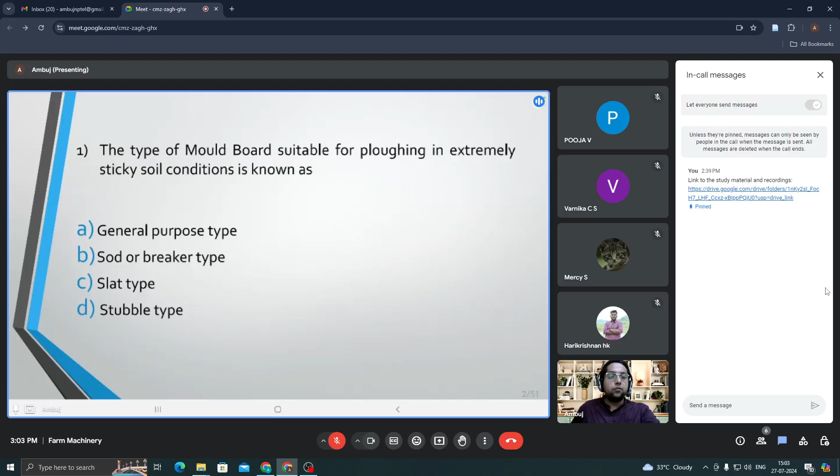So the very first question for this session is this: the type of moldboard suitable for plowing in extremely sticky soil conditions is known as general purpose type, sod or breaker type, slat type, or stubble type. Based on the previous week's content, just try to answer this question. You need not be correct in the first attempt, but just try to solve it. Give your options in the comment section or in the chat box.

Just try to give the right option. Only the option can also work, if you don't want to type the full option. Yes, Varnika has answered slat type. The type of moldboard suitable for plowing in extremely sticky soil conditions. Yes, Hari Krishnan has answered slat type. Okay, great.

Two more people are left. Please do try to answer it. There is no penalty, nobody will harm you. Whatever option comes to your mind, you can just give the option. Okay, Mercy is saying slat type. Okay, slat type. Great. Let's proceed.

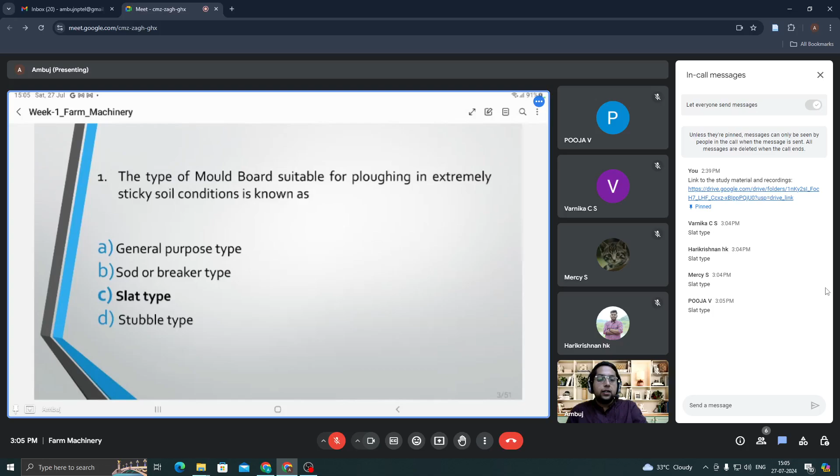Yes, the type of moldboard which is suitable for plowing in extremely sticky soil conditions is known as slat type. Let us look at the explanation in detail. These are some of the types of moldboard available in a moldboard plow. First, the general purpose bottom. It lies in between the two extremes and is suitable for a wide range of conditions, not specifically for one particular attribute, but it can be used for a lot of purposes. That is why it is named general purpose.

Second one was sod or breaker type. It has a long and low moldboard with a gradual twist, or spiral, that completely inverts the furrow slice with a minimum of breakup, thus covering the vegetative matter thoroughly. This is very useful when you have bushy conditions or some type of debris on the soil. You can invert the soil and convert the vegetative matter into manure. For that purpose your sod or breaker type bottom is useful.

Third option was slat bottom. It has portions of the moldboard cut out and is extremely useful in extremely sticky soil conditions. And the last option was stubble bottom. It has a relatively short and broad moldboard that is curved rather abruptly near the top, resulting in a greater degree of pulverization than with the other types. These are four different types of moldboards and their uses.

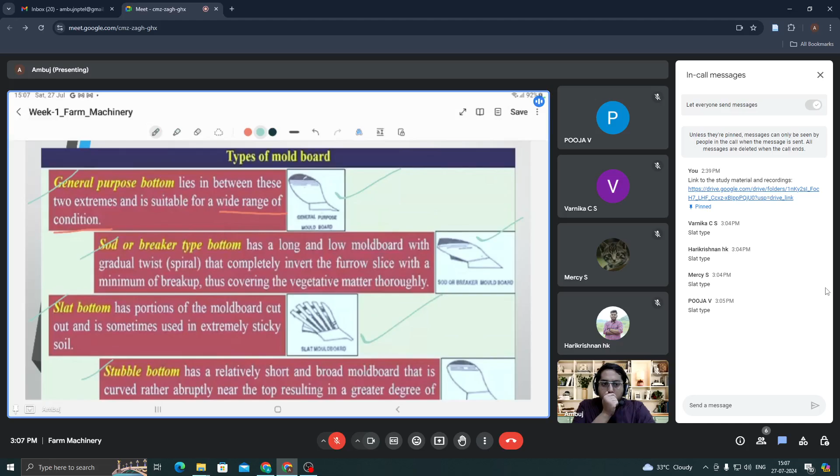Now I'm trying to be a little bit interactive with you people. If you have gone through the lectures, just answer how we model the surface of a moldboard. My question is very simple. These are the types of moldboards. Now I have seen a moldboard and I want to model it. For your understanding only, just try to give the answer: how can I truly design or create the surface of a moldboard? Any idea? Anyone?

You can type also, or if you want you can unmute and just tell me. Based on the soil surface. Very good. Hari Krishnan is saying that based on the soil surface. I think you didn't understand the question.

I just wanted to ask you how you will model the surface of a mold board. Modeling means I want to create a design of that particular mold board. So I'll try to create some surface, then I'll try to model it, and then I'll try to do some analysis so that we know which type of mold board is suitable for which type of soil condition. So how to model that surface? Yes, you want to answer? Then you can please answer.

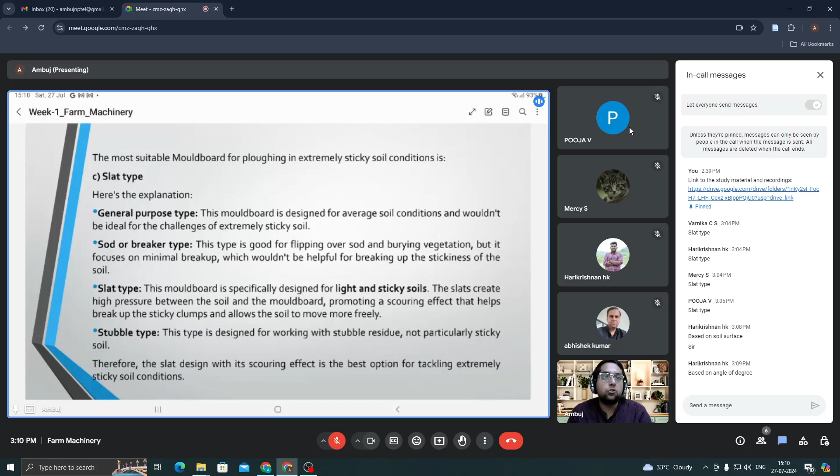The most suitable mold board for plowing in extremely sticky soil conditions, as I already told you, is the slat type. General purpose type is for average soil conditions. This one is important, please do remember. It wouldn't be ideal for extremely sticky soil conditions. Sod or breaker type is good for flipping over sod or burying vegetation. If you have some debris on your soil and you want to bury it to improve soil fertility, you can use the sod or breaker type.

Slat type is extremely useful for light and sticky soils. The slats create high pressure between the soil and the mold board, promoting a scouring effect. What do you mean by scouring? Scouring is the process of destruction of the outer layer of the soil. The scouring effect helps break up sticky clumps and allows the soil to move more freely. So free movement of soil is there because of this scouring effect. Slat type, good.

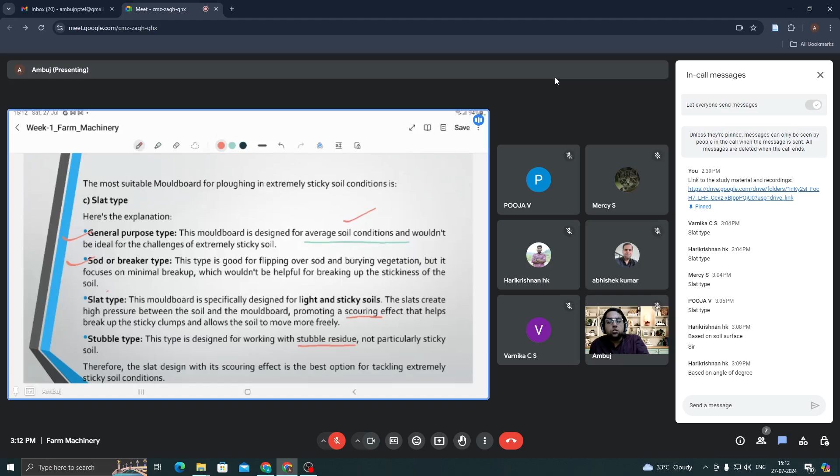The stubble type is designed for working with stubble residue, not particularly sticky conditions. So each type of mold board has a particular use. We have modeled it, and how the modeling is done I have also told you, just for your curiosity. In the design process we know which type of implement or cutting tool we have to use for which type of soil conditions, and that is done by finite element modeling. That was just for your information and understanding.

Clear? If anyone has any doubt, then please do ask me. Otherwise we'll move forward. If you are clear, then please type clear. Meanwhile, be as responsive as possible in this session. Clear, great. I'm assuming that everyone is clear.

We'll move forward. A very simple, very easy question, please do try to answer it. The disk angle in a standard disk plow varies in the range of: 40 to 50 degree, 42 to 45 degree, 15 to 25 degree, or 25 to 30 degree. Please try to answer this question. I am talking about the disk plow, and I want to know what the disk angle is.

42 to 45, okay, great. Two people have answered B. Try to be as responsive as possible; this is a live interactive session for you. Do try to clarify all your doubts. You need not be correct in the first attempt, just try to answer. Two people have said B, one has said C, and another one has said A. Great, a variety of options. Yes, Abhishek Kumar, if you have any doubt, please ask me. No, sir, no doubt.

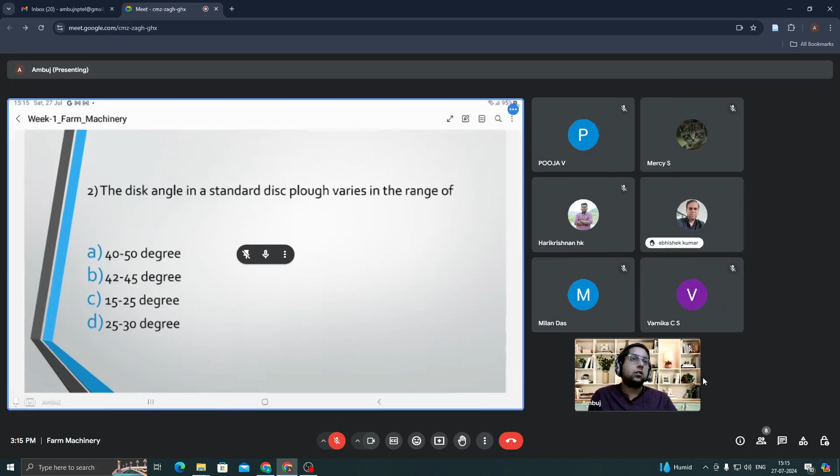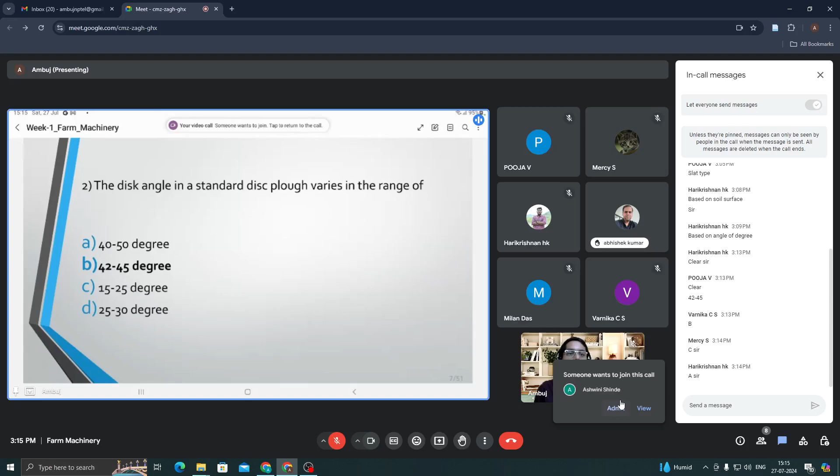Let us understand what these angles are. Here you can see a disk. If you draw a vertical plane which passes through the center of the disk, the angle the plane of the disk makes with the vertical is known as tilt angle. With the direction of traversal, the angle the disk makes with the horizontal axis is known as disk angle. These are two particular angles.

So the correct option for disk angle would be 42 to 45 degrees. It is a very narrow range. How we came to that, I'll tell you. Just in a few minutes I'll explain how we arrived at that particular range. Just bear with me.

15 to 25 degrees, this is a range for tilt angle of the disk, as I already told you, not the disk angle. Tilt angle refers to the angle between the disk and the vertical plane, whereas disk angle is the angle between the disk and the direction of travel.

Very simply I have explained here what is tilt angle and what is disk angle. Sir has already explained these terms in the lecture, but I am explaining once again in very simple terms. Then the other option was 25 to 30. It's very low. As compared to standard disk plows, we don't generally prefer this much lower disk angle, because it can reduce the penetration but at the same time it will also increase disk rotation.

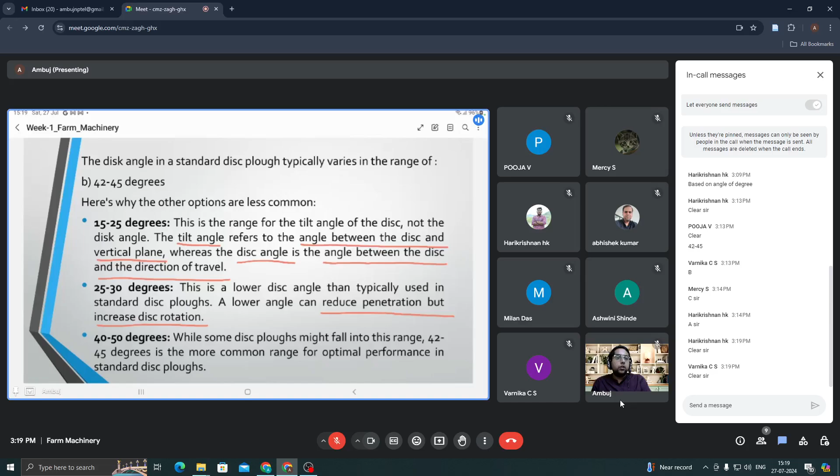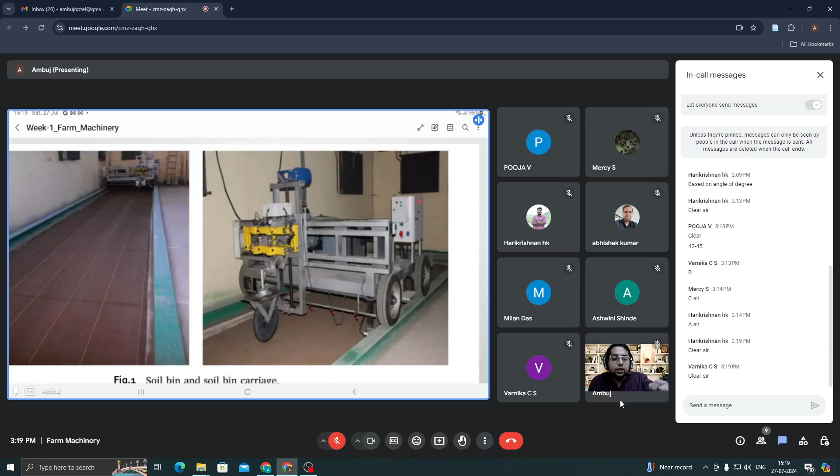Now just see this particular figure. Here I'll zoom in for you. This is soil bin. This is soil bin, left figure. This is soil bin. Here what is happening? This particular thing is known as soil bin carriage. This particular machine is there and it is run in this particular soil bin.

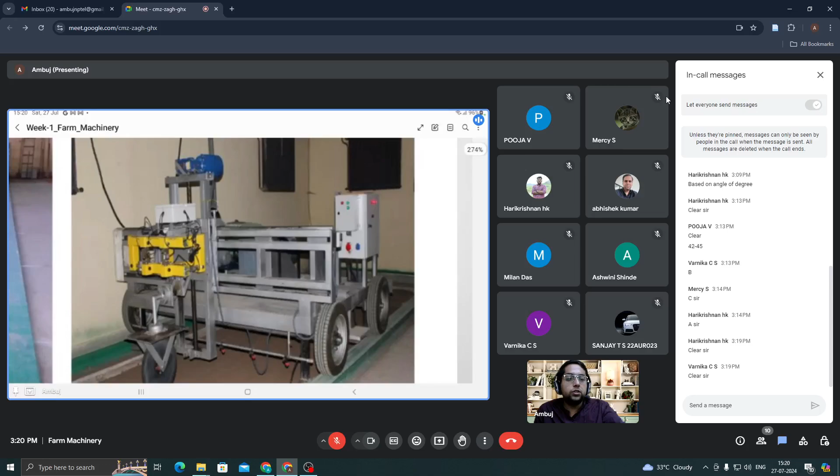So in the soil bin, different types of soil conditions are maintained. Heavy soil, medium soil, clay soil, any type of soil we can input. Here at IIT Kharagpur we have two particular soil bins, so similar to that I am showing you this picture. This particular thing is known as soil bin. Inside this, this particular setup is there which is known as soil bin carriage. Here I want you to just see these particular wheels, four wheels are there.

Four wheels are there, which will guide through this particular setup. And this particular is power unit.

And here, this particular screw, which I'm just putting an arrow to, is the lead screw. It is used to lower down or increase the height of this particular carriage. This is the lead screw, the black one.

This one is your motor. Just try to visualize this. This is another control box.

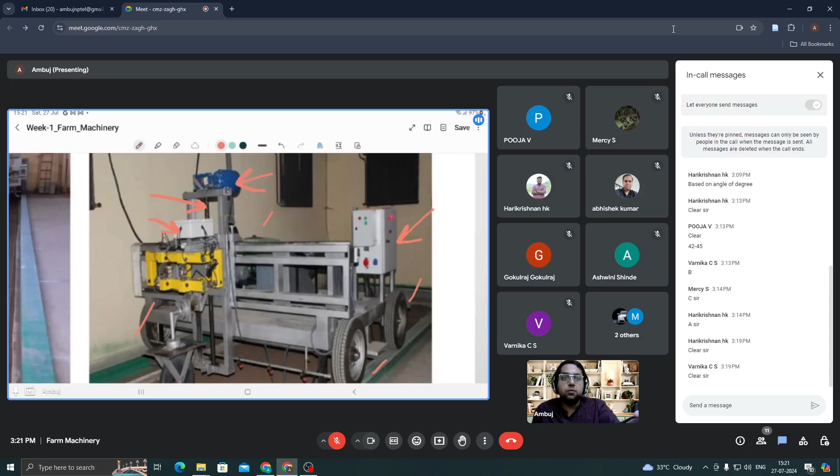And the most important thing which I want to show you is this particular thing here. I'm just creating a box around it. Here I have placed one disk, and the disk is supported by this platform. This particular platform is just connected to this rod.

What is this setup? This setup is provided so that you can change the disk angle, and the tilt angle of the disk, and mechanically actuate the disk in the soil bin so that you can calculate the forces. For force calculation, force transducers are fitted.

Force transducers - what are those? Those are strain gauges put in a Wheatstone bridge. Simply, you can understand the Wheatstone bridge - it's a concept you must have read in class 12th. Four resistors when connected in this form. I'm just giving you the concept in short.

In this particular manner, like this: R1, R2, R3, and R4. They have to be connected in this particular diamond shape, and the ratio has to be maintained such that R1 by R4 is equal to R2 by R3.

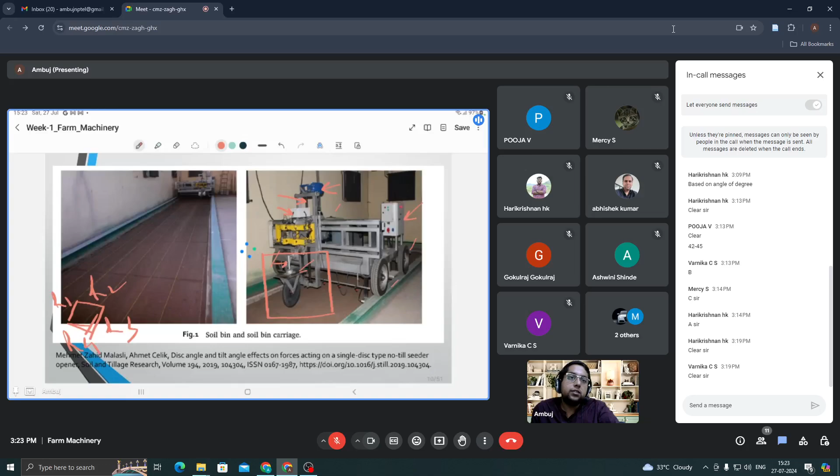So in this particular configuration, known as the Wheatstone bridge, when any amount of force is induced, as you know R is rho L by A, then the resistance of the Wheatstone bridge changes.

So when resistance changes, then what happens? The current changes, and we can calibrate this change of current with load. So this is the basic principle of the working of a force transducer - it is nothing but four strain gauges put in a Wheatstone bridge.

So these force transducers are used to measure the force - whatever is the amount of draft force, vertical force, side force, each and every force we can calculate using the force transducer, fitted on this particular setup.

Lowering or increasing the height, depth of penetration, that is also available. Changing the angle is also available - the disc is joint here only rigidly, but the rest of the angles we can very easily change by just loosening the nuts and bolts and tightening them to the correct amount of angle.

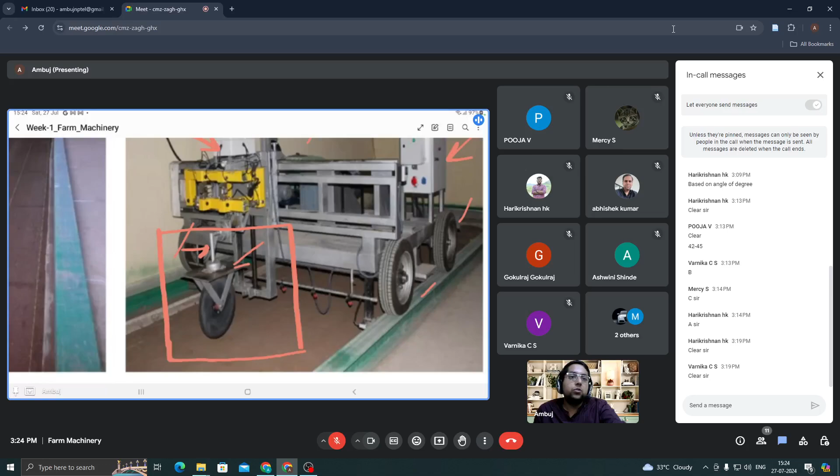So here in this particular setup we just perform the test. Now here's another figure - here we have done it for a single-disc type furrow opener, and loading also you can see here. Very nicely they have depicted how disc angle and tilt angle we can change, and we can measure the amount of forces.

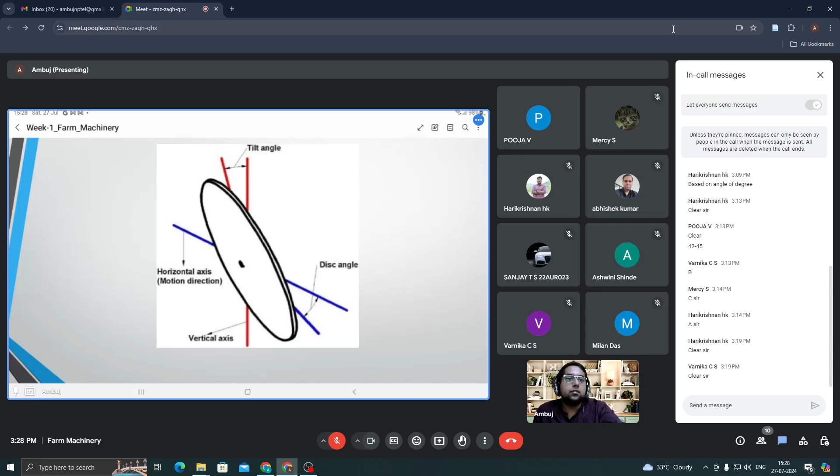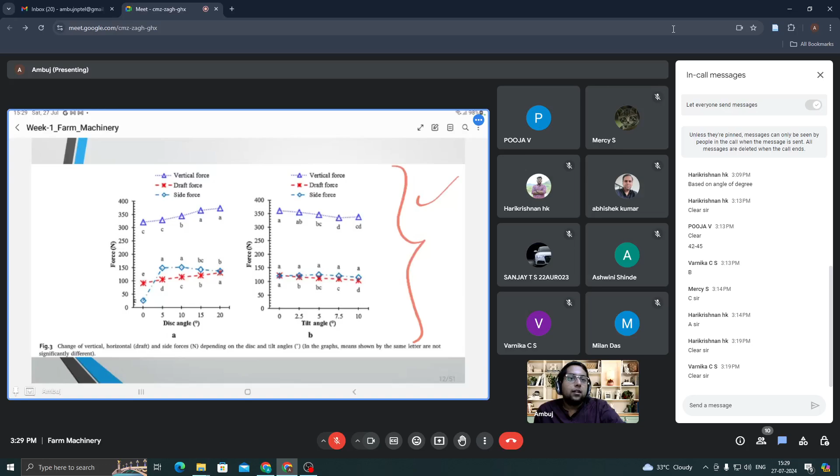Okay, sir. Yes, sir. Okay, clear? Any doubts, anybody? Clear, not clear? Everything clear? Feeling boring? Want to speed up? Anything? Clear? No response. What happened? Clear. Great. Okay, let's move forward.

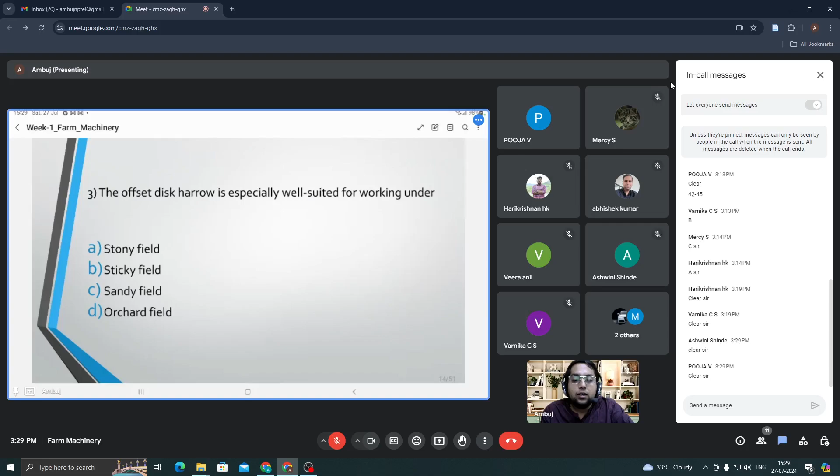The offset disk harrow is especially well suited for working under stony field, sticky field, sandy field, or orchard field. Four options are there. Just try to answer it based on your knowledge.

A lot of people have joined. Oh yes, yes, please, Abhishek Kumar, please do try to answer this question. If D, yes, option is D. You can just type it. A lot of people have joined, so I'll not be able to note, you please just type it. A lot of new people have joined. I'll be posting questions based on the previous week's content. Please do try to answer it using the comment box, chat box. Yes, Pooja wants to say something.

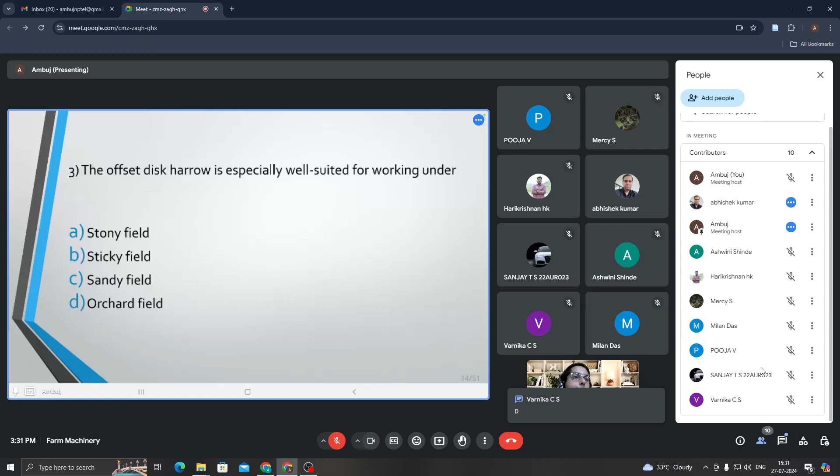Okay, two people are saying D. I'll write here D option from Abhishek. A lot of people are saying D. Great. Nice, this time we are seeing a clear majority up till yet. Anyone wants to differ from option D? Okay, D, offset disk harrow.

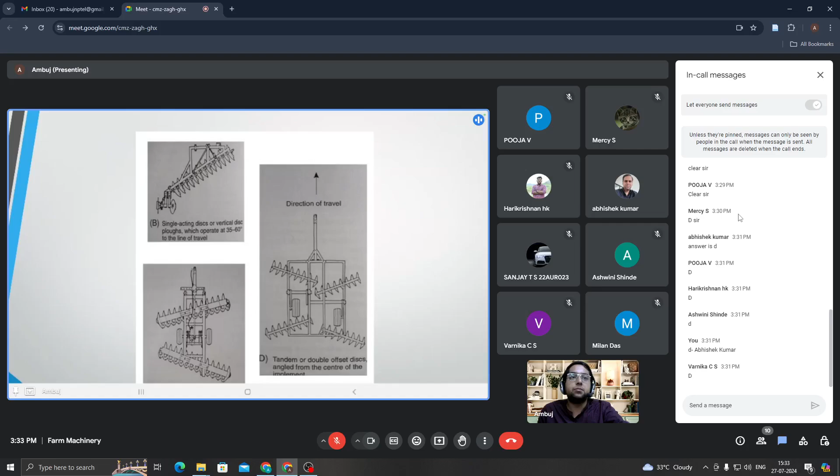Yeah, the correct option would be D. The offset disk harrow is especially well suited for working under orchard field. See here, three types of disk harrow I have shown here. First option is single acting disk harrow. Don't go for the numbering, it should have been A, here I have written B by mistake. The other one is offset disk harrow, and this one is tandem or double offset disk harrow.

Try to visualize. Single acting disk harrow will be moving. How it will be moving? It will be attached to the tractor, then it will be moving in a particular direction. This particular offset disk harrow, why it is extremely useful for orchard condition? The reason is that the line of pull would not be in a straight line, so it has a high maneuverability, so it can just move around the trees. This is the reason we consider offset disk harrow for orchards.

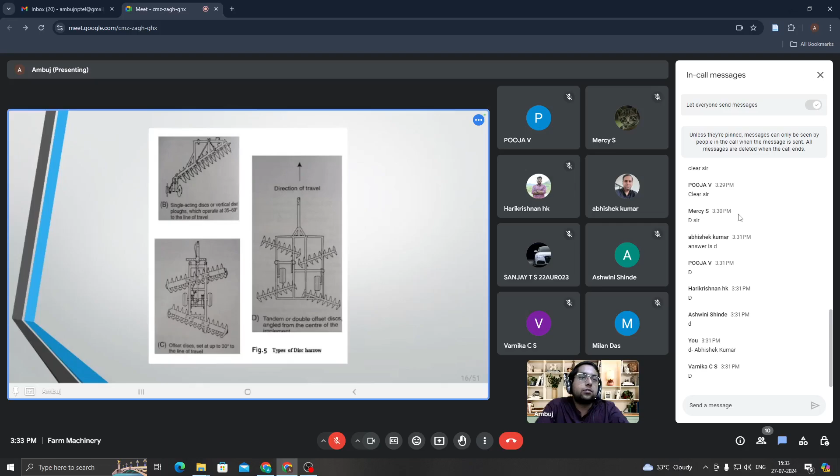Offset disk harrow, just we can see here, offset disk harrow is an agricultural implement that is used to till the soil where crops are planted. Obviously all the harrows are for this particular purpose only. Consists of series of concave metal discs arranged in two or more rows. I already showed you.

These discs cut into the soil, breaking it up and turning it over. Okay, offset disc harrow. Suitability for different field conditions. Stony field. I have analyzed all the options for you. Just after this class or during this class also, just try to go through how you can analyze. The first condition was stony field.

What is the challenge? A stony field can damage the disc of the harrow and reduce its effectiveness. That is why disc harrow is not a particular option. Stones can cause wear and tear. It's harrow, not plow. You might ask me that a disc plow is generally suited for stony conditions. Both the implements have different designs.

The harrow has a lesser diameter disc as compared to the disc plow. The diameter of the disc plow is large, as well as the strength of the material is also large. Stones can cause wear and tear. That is why we are not going for stony field conditions.

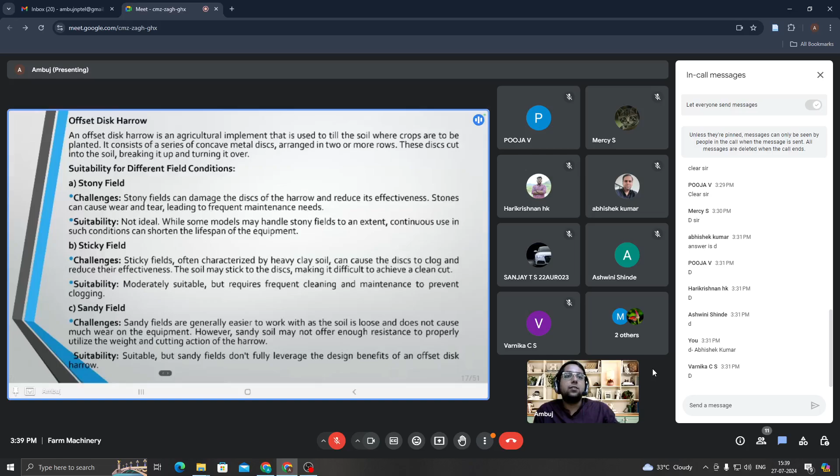This is the explanation from my side. Any doubts, anybody? Please do ask me. I have analyzed each of the options, not just the correct option: A, B, C, and D, and I have told you why the offset disc harrow is best suited for orchards. Any doubts? Anybody? Clear? Not clear?

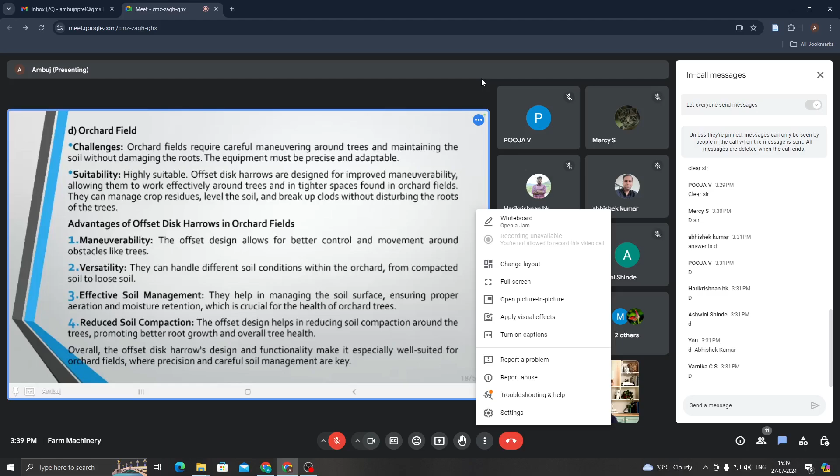No response. Clear? Not clear? Any doubt? Anything? Clear. Okay. Clear. Good. Clear. Great. I think in the afternoon, most of the people have had a great lunch. That is why people are feeling sleepy. If it is the case, then you can tell me. I'll adjust my pace accordingly. I'll try to explain it once again if you are feeling sleepy. Okay. Good.

Now moving towards our next question. Which type of blade is most preferable for operating the rotavator in trashy conditions? This question is again related to design. So think accordingly and then try to answer. Options are twisted blade, straight blade, curved blade, and L-type blade. Do try to think first, then try to answer. Take your time, but try to answer it correctly. Yes, Varnika has answered. I think D. Yes, great. D. Okay.

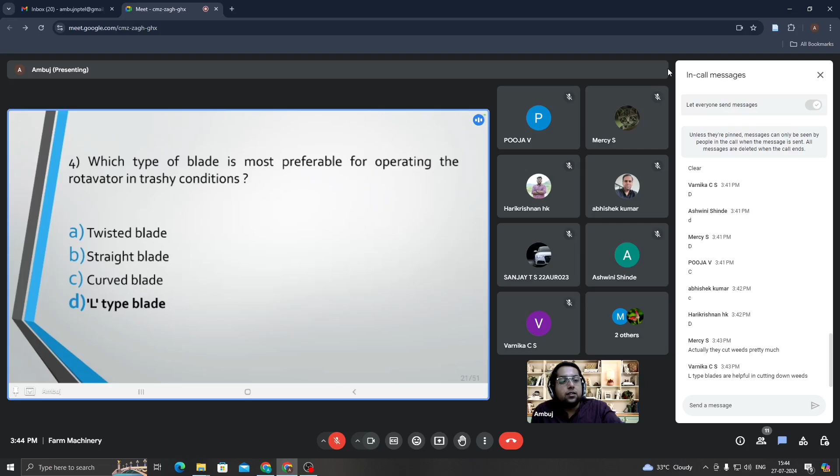I think we should move forward. Whomsoever answered D, they are absolutely correct. Indeed, the explanation is also correct. L-type blades are helpful in cutting down the weeds. That is why we will go for option D. Why not for option C? This is a particular question which you can ask me as well as you can ask yourself. I'll answer it. Make a C here. This is a blade. I'll make a C and I'll make a L.

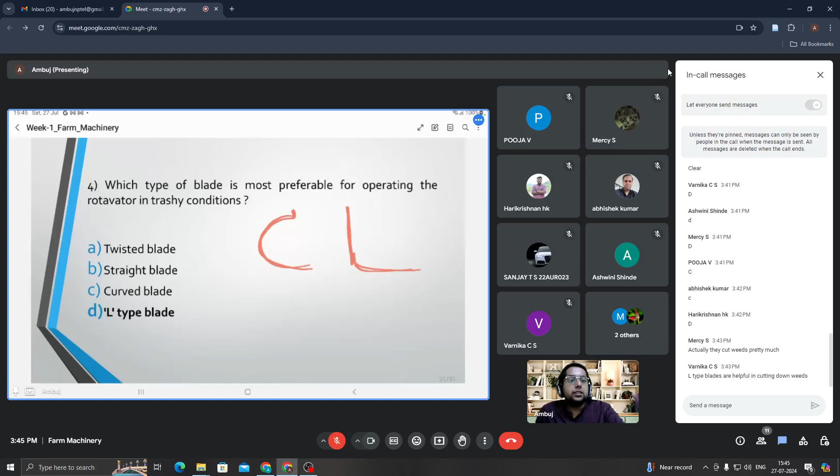This will be the profile for the blade. C will be somewhat like this. I made the curvature somewhat more, but it will be somewhat like that only. No problem. C type blade as well as L type blade. The center of stress in C type blade would be at this place. Center of stress, or the point where the force distribution would be highest. That would be this place. And in case of L type blade, it would be at this place. Do you agree?

The force concentration in the entire profile will be highest at the joint in case of C type, and at the L type it would be at the junction. I think you can very easily visualize it. If you'll go for modeling, then same result you will see. I'm telling you in advance. So in case of C type blade, the failure chances are slightly higher. In case of L type blade, the thickness of the blade is the maximum at this particular place which I have highlighted. I made a circle in both the blades. That thickness would be highest where I have circled.

Why is it so? Sometimes material is also changed because the force acting would be highest when the cutting tool will interact with the soil. The force would be highest at these particular highlighted points. So when the soil condition is trashy or somewhat rough, chances of failure would be slightly higher in case of C type blade. Otherwise, we can go for C type blade, or curved blade. But if you are going for twisted blade, the draft would be somewhat higher.

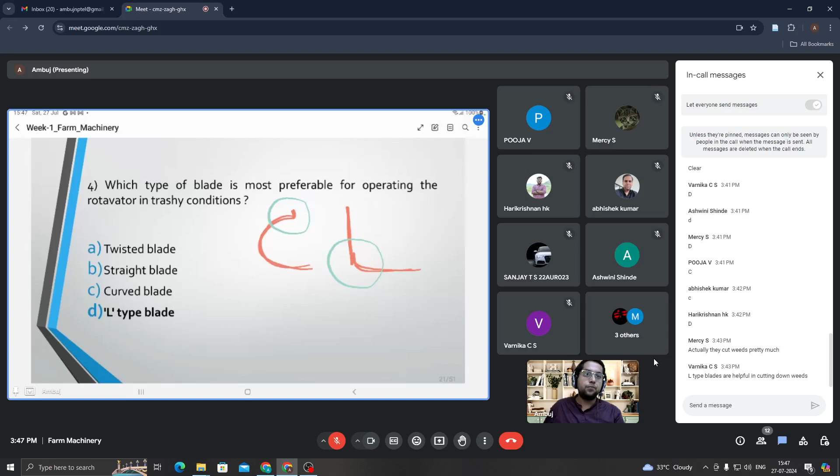Okay, twisted blade can also work. Straight blade, it is having the highest possibility of failing in case of trashy soils. Okay. Let's move forward. Look at the explanation. Twisted blade: while twisted blades can offer good mixing and good penetration, they are not ideal for trashy condition.

The twist can catch the debris. Potentially, they can cause blockages. Sometimes you must have seen also while the rotavator is operating. Straight blade: straight blades are good for general purpose tilling. Yeah, they are good. As far as the cost is concerned, they are slightly on the lower side also, but lack the aggressiveness that is needed to cut through heavy trash.

Okay, then you go for curved blade. Curved blades offer some improvement over straight blades in terms of penetration, but they might still struggle with significant amount of trash. Okay, the section is mainly concerned for it. There I have drawn C type section. Curved blades come in different types of sections. So based on the section only, I can say whether the trash or the soil mass will get stuck or not. Okay. Then your fourth option was L type blade.

Yes, L types are specifically designed for handling trashy conditions. Okay. See there the profile. If you see, the trash cannot get accumulated while the rotavator is operating. The L shape provides a good chopping action that helps break down debris while also offering good soil penetration. That makes them ideal for tilling land with significant amounts of crop residue, weeds, or other organic matter. That is why my option would be option D.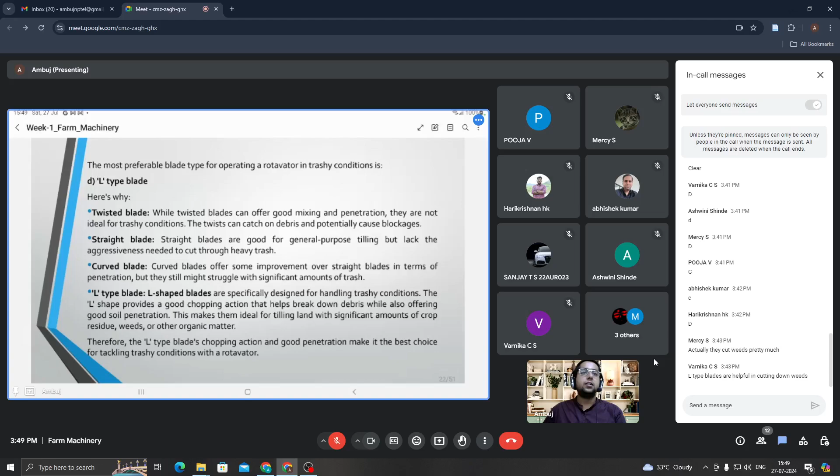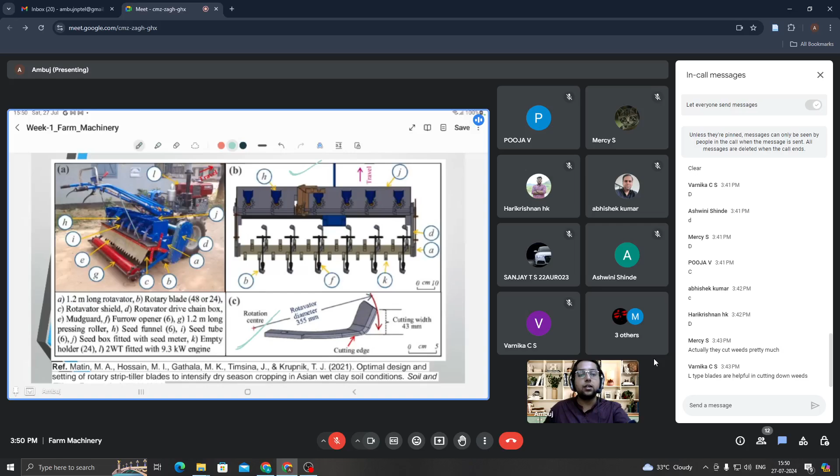Okay. See, here I have given you the detailed explanation. This is a rotary tiller. It is a self-propelled tiller which is fitted with rotavator. It's a hybrid machine. It's from a research paper. Just try to see it. So here in the C figure, this type of blade is known as L-type blade. And this particular thing in B figure is the diagram of the machine. Here the blades are fitted. So different types of blades we can always change using the nuts and bolts. They are only tightened.

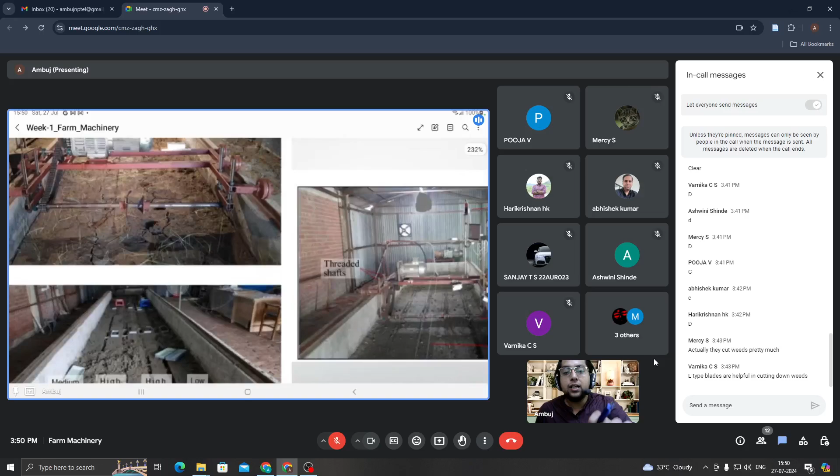Yes. So here for different types of soil conditions, medium, high, low. In the B figure, try to see it. Same setup is there. A soil bin is there. And this type of rolling structure they have made. This particular motor is AC motor. It's a high torque motor. Based on this configuration, I cannot tell whether it is AC or DC, but it would be high torque motor. Generally, we go for high torque motor because it won't be getting struck in between. The draft will change quickly. So that is why we are going for high torque motor.

We have provided in this particular figure, try to visualize, high speed camera, we have provided computer, then thread shaft is there, tool carriage is there. This particular angle iron frame is known as tool carriage. Lighting is there, rotor flange is there, winch cable is there. Why I have made this particular setup? Because I want to change the type of the blade and I want to visualize which type of blade is throwing the soil in which direction, as well as I want to measure parameters.

I just try to show you so that you can visualize how things are happening in real. It's not just for passing the course or just understanding. I want that you should understand the things in little detail, in depth, so that when you become researchers or you go in higher studies or even you go for any engineering job, you can always think how real application problems can be dealt. That is why with each and every question I try to make you visualize things.

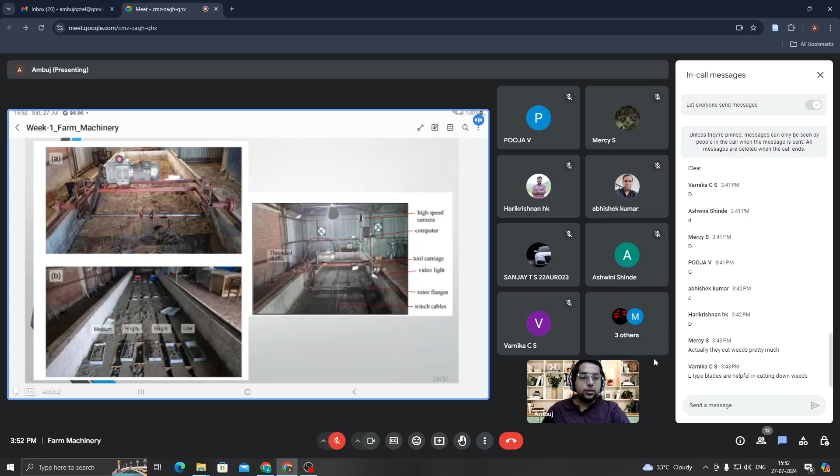It must have come to your mind that A, B, C, and D, these four are the options. But at the back, you should always think why A, B, and C cannot be the correct option, why D is the option. That is why after each and every question, I am trying to make you visualize. So this particular setup I have made. Now we'll move forward. Just a second.

So in this particular research, they have dealt with three blades: conventional, medium, straight. Four conventional blades they have tested, then four medium blades they have tested, then four straight blades they have tested, and they are up to the visualization of how the soil is getting cut. Okay, this is the main idea.

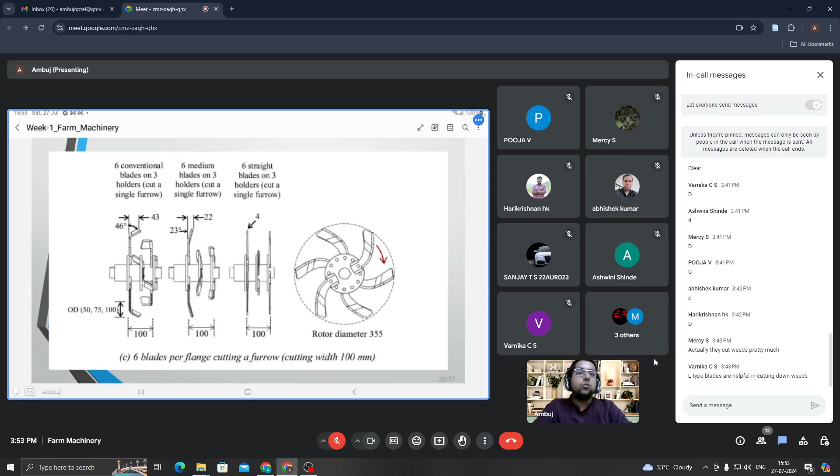Similarly, this type of combination they have also used, that if you go for straight, then straight-to-straight combination. Okay. Similarly, you can also think about what will happen if I mix the L type with the straight type. Okay. So that is from a research point of view.

Okay. See, here with the high speed camera we are able to visualize. We are able to see, when a rotavator is rotated or when it cuts the soil, in which direction I am getting the soil movement. Okay. After that, I'll be able to obtain some results. Like in this particular figure, they have obtained the results. Like blade operating depth, they have obtained.

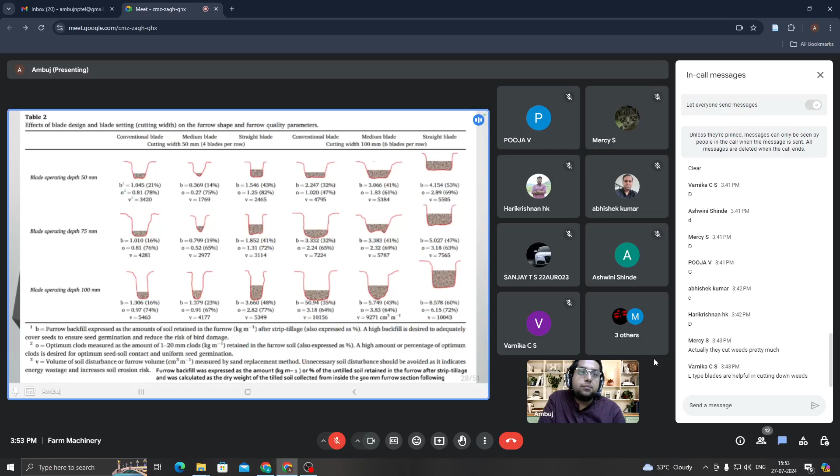They have changed the operating depth and they have got three particular attributes: furrow backfill, optimum clod, and volume of soil disturbance. Furrow backfill is measured in kg per meter. Okay, it's just a technical term. Please try to understand it. It's the percentage of the untilled soil retained in the furrow after strip tillage. Okay, and it is calculated by the dry weight of the tilled soil collected from inside the 500 furrow section. Okay, furrow backfill, the percentage of the untilled soil retained in the furrow.

So this will give you a slight idea that the blade configuration which has maximum furrow backfill would be the most useful one. Okay. Similarly, clod diameter: we try to measure the amount of 1 to 20 mm clods retained in the furrow soil. Okay. So for some particular crops, a particular diameter of the clod would be more useful. So the configuration can be selected accordingly.

Okay. Then volume of soil disturbance, that is measured using the sand replacement method. Okay. In this particular method, when the apparatus is passed, the removed soil is filled with sand, and the sand is again removed and the volume is measured. Okay, that is the volume of soil disturbance or the furrow volume. So the higher it is, the higher the disturbance. Okay, so based on this configuration checking, I can get which type of blade configuration would be the most suitable for which type of soil condition.

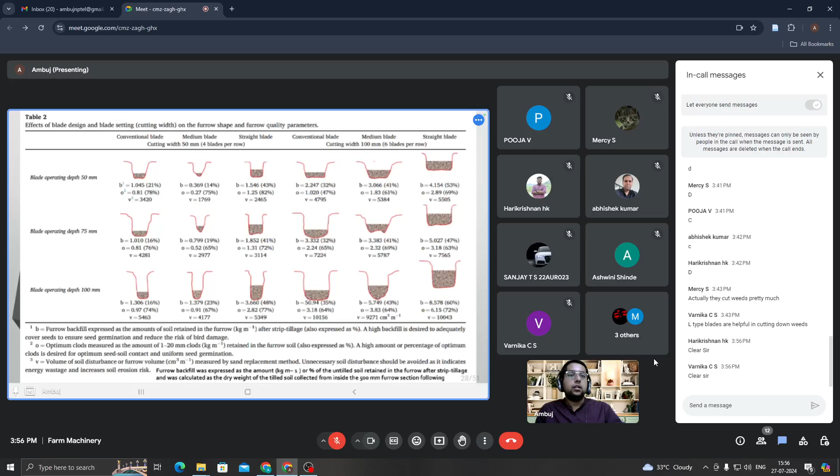The application in this particular course, for any particular topic, is straightforward only. Okay. From the exam point of view, directly go for the explanation. But how I reach that explanation, I am explaining to you through various research papers. These are all research papers. So that you don't get bored, and your knowledge is enhanced comprehensively. Okay. You yourself can design such experiments. You yourself can reach conclusions in a scientific manner. That is my intention. That is why I am explaining each and everything. If at any point you have any doubt, please ask me.

Okay. Yes. Only for Varnika it is clear. For the rest of the people? Yes. For Harikrishnan it is clear. Anybody else? Yes, yes, clear. Great, great. Please do write these types of comments continuously. I also get encouraged that it is getting clear to you. Okay. Yes. Let us move forward.

Yes, the advantage of a reversible mould plow as compared to a one-way plow is to: make back furrow, make dead furrow, make both back and dead furrow, not make any back or dead furrow. Yes, this is the fifth question. Please do try to answer this question. If you know the meaning of furrow, then you can very easily answer it. Okay. Yes. People are saying D. Great. Very nice. Okay. 3 people have answered D.

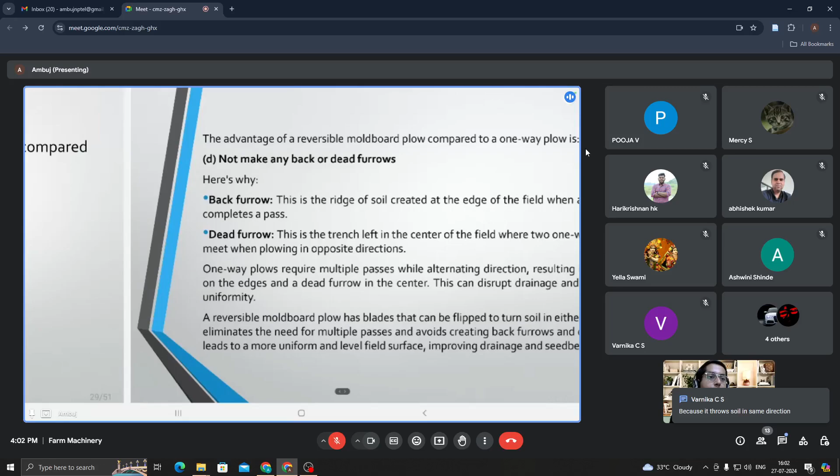Okay. So two major options are there, option A and option D. A won't be correct, D would be correct. Not to make any back or dead furrow. Yes, because it throws soil in same direction. Okay. Now I have to check which option you have chosen. Just a second. Yes, yes, yes. Because it throws the soil in the same direction. Great. The advantage, okay, just a second. I haven't highlighted it. Okay.

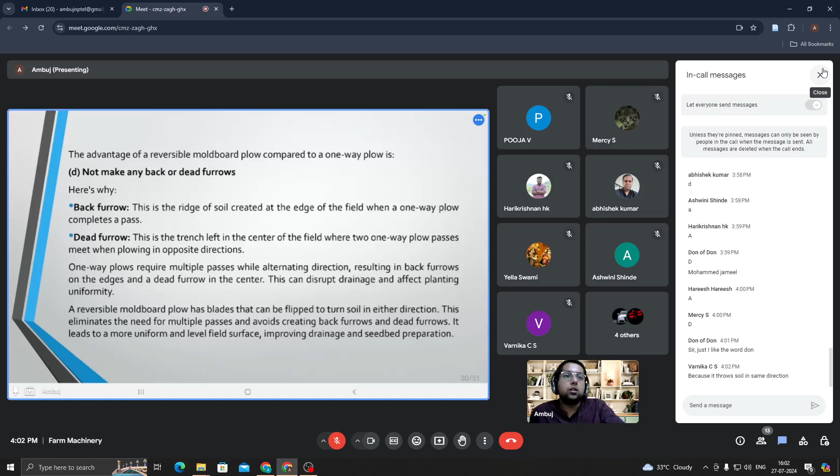The advantage of a reversible mouldboard plow compared to one-way plow is not to make any back or dead furrow. Okay. What is a back furrow? This is the ridge of the soil which is created at the edge of the field when a one-way plow completes a pass. Just one second, I'll show you it in the image. For the time being, just remember this keyword: edge of the field, okay? Just a second, I'll highlight it.

Ridge of the soil, which is created at the edge of the field when a one-way plow completes a pass. And dead furrow, this is the trench left at the center of the field. One is at the edge of the field and another one is at the center of the field. Where two one-way plow passes meet, means one pass will interact with another pass. One will be in one direction, another one in another direction, because with one-way plow you have to go in the same direction or you can reverse.

First of all, we have to always move in the same direction. Why we have to do it? Because the slope of the field should be uniform. It should not be having trenches in between. When the farmer will irrigate the field, if trenches are present, then the accumulation of water will take place. That is why the slope of the field has to be uniform. It has to be in one direction only.

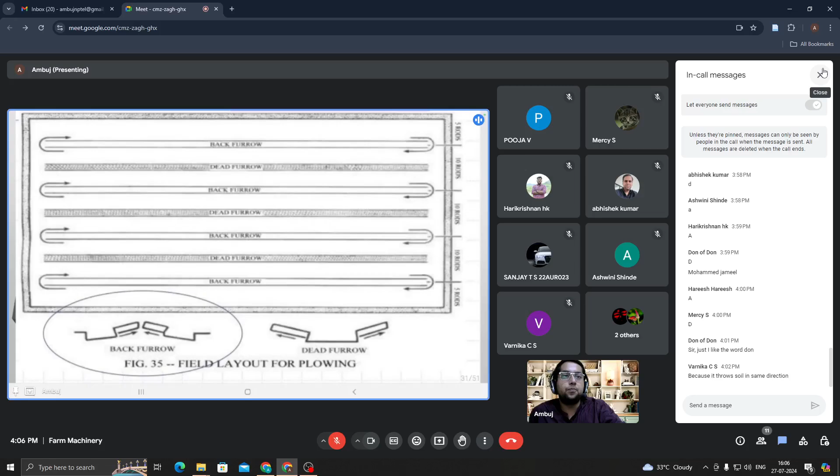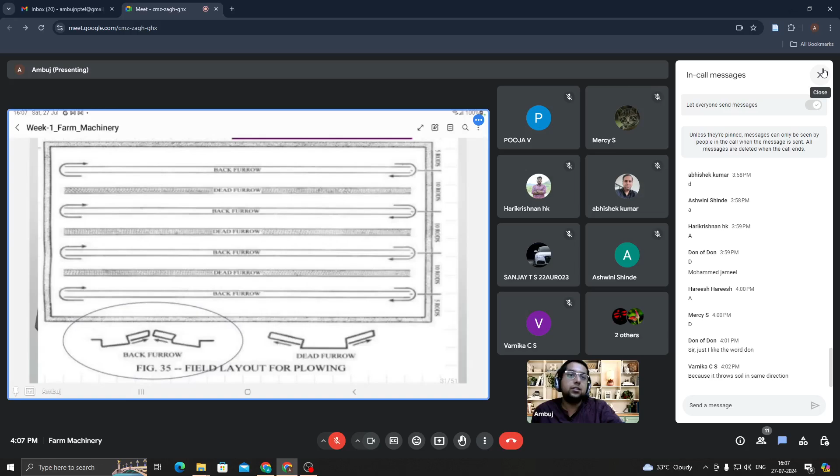Just after this class, go through my notes and try to visualize this question. Is it clear? Does anybody have any doubt about how these two back furrows are eliminated by using a reversible moldboard plow, because the plow is just reversed? The direction of traversal is not reversed.

Yes, Abhishek Kumar, please ask me your doubt. My question is that when the back furrow and dead furrow are formed in the field, is it when plowing from center to outside, or outside to center? In both cases? I don't understand this concept, sir. Okay, let me explain once more. Two particular methods are there, as you said. One is from... Yes, another doubt, sir. I have doubts about the 25 to 30 degree disc angle. Okay, I'll revisit that. Let me just answer Abhishek's question first.

In both cases, whether I am plowing the field from center to side, or from side to center, the furrow gets created because of tilling the field with a one-way plow. It is not the method of tilling which creates the dead furrow and back furrow, it's because of the plow itself, since it's a one-way plow. When I move the one-way plow from one direction to another, I have to reverse it. I have to either manually reverse the plow, which is not feasible, so we reverse the tractor. Because of that, two particular ridges get created: one is the back furrow, the other is the dead furrow.

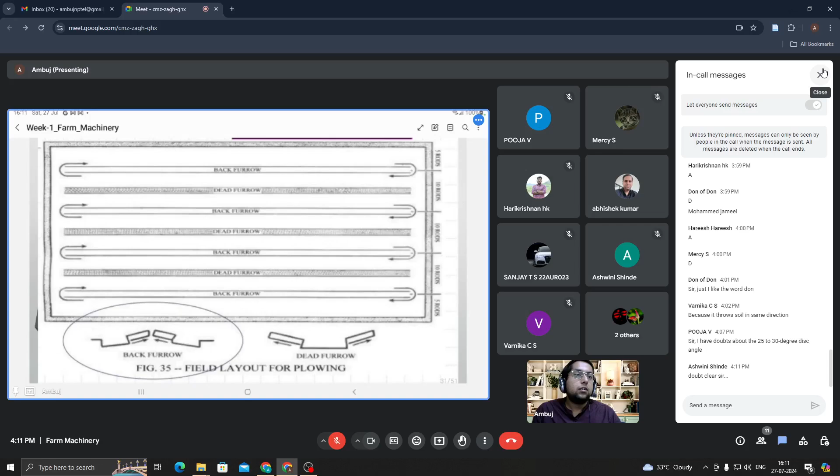Clear? Yes, still clear, if you're clear, great. Yes, yes, okay, clear. Still, if you have any doubt, just visit some field once.

Your concept would be 100% clear. Talk to any farmer and he will be able to give you the entire explanation correctly. There's something here which I cannot show you - even if I click photos showing this is the dead furrow, this is the back furrow, it won't help, because visualization sometimes requires visiting the field. For now, just go with the explanation and the theory part, but for real application you can always go to the field. That's my sincere advice. As far as visualization is concerned, in every question I have provided research papers also for this purpose, so that your explanation is wholesome.

In this particular question, the soil condition, if I take the photograph from the top view, it will be the same only. This is a thing of visualization.

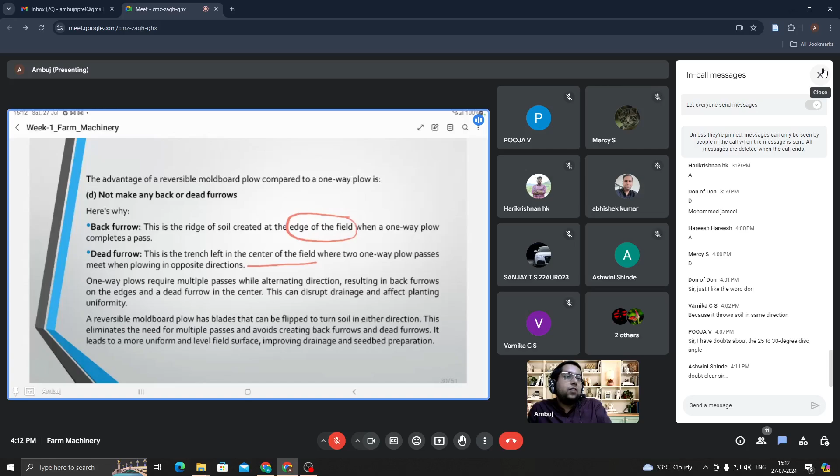Sir, I have doubts about the 25 to 30 degree disc angle. Disc angle is 42 to 45 degree, not 25 to 30 degree. Tilt angle is 15 to 25 degree, I already told you. I think you want to go for this question. Disk angle is 42 to 45 degree, tilt angle is 15 to 25 degree, and I explained you why I am keeping this particular range, using this soil bin and soil bin carriage example. If any specific doubt is there, please do ask me. Rest we can move forward.

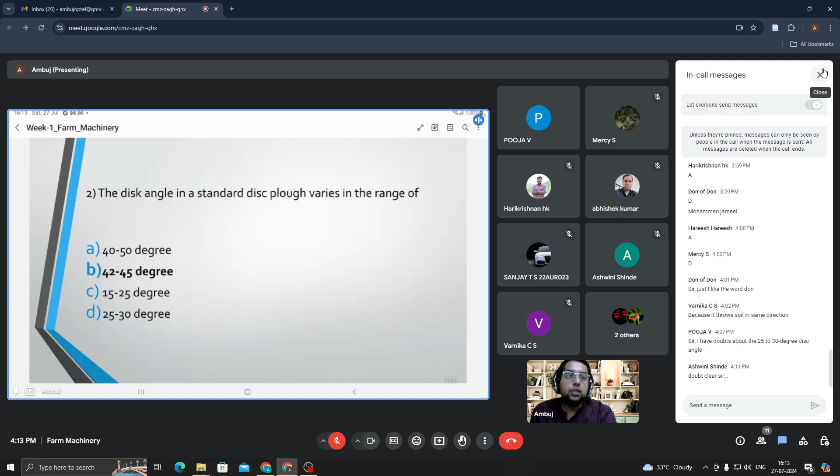Sir, that 25 to 30 degree disc angle, yes, it will increase the depth, it's given sir in slide. That's fine. Yes, a 25 to 30 degree disc angle is a lower angle. See, 42 to 45 degrees is on a higher side. So first point is that this 25 to 30 is on a lower side. A lower angle can reduce penetration but increase disc rotation.

So you are having doubt how this is happening, or you want to say that it will not happen? What's the explanation from your side? First tell me. Sir, actually it will not reduce the penetration, but it will only decrease the width of cut, I am thinking sir. Very good, very nice.

I absolutely admire your visualization. First thing is this. I congratulate you for this. Now I'll tell you how things are happening.

See, both the angles are connected. First of all, try to understand it. If I am changing my disk angle, my tilt angle will also change. Do you agree or not? Yes sir. Why do you agree? It will not happen on its own, we keep it. Just try to understand it.

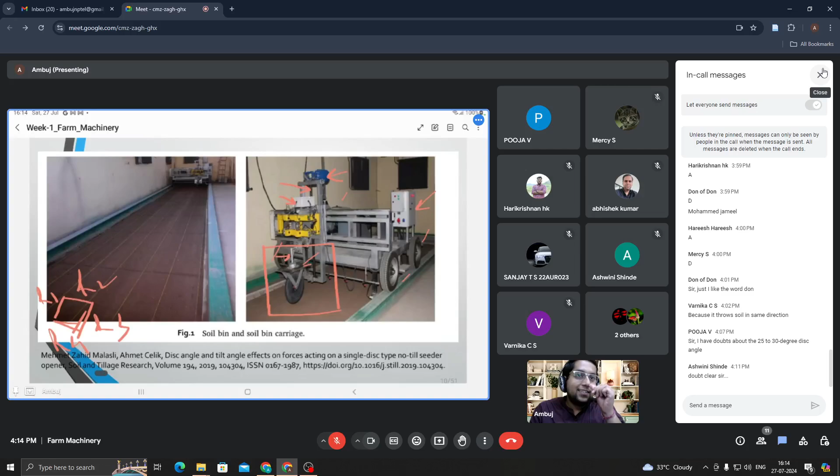Here, if you are seeing, are you able to visualize in figure second? Disk angle is also there, tilt angle is also there. From the horizontal an angle is maintained, and from the vertical an angle is getting maintained, passing through the center of the disk. Just draw a line, then you would be able to visualize what is my tilt angle and what is my disk angle.

Now, if I am going for a lower disk angle, what is happening with the direction of the traveling? I'll just draw it. First, the disk angle was somewhat like this. This is condition number A.

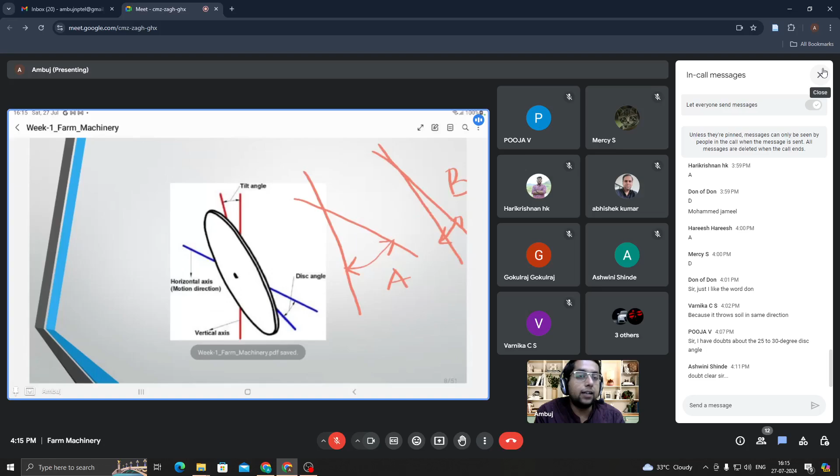And after that, I went to a slightly lower disk angle. These are my two particular things. Here, if in this figure you can see, the disk angle is somewhat close to 45 degree only, from the direction of the traversal it is close to 45 degree.

And what I am saying is that a lower disk angle can reduce the penetration but increase the disk rotation. First of all, if I am lowering the disk angle, then the thrust force which will act on the plane of the disk will increase. It will increase the rotation of the disk. Do you agree or not?

For the second point, yes, yes, I am just asking from you. Are you clear about this, that when I am lowering the disk angle, then the rotation will increase? If this point is clear, then I'll tell you the first part. Yes sir, yes, you agree right, that lowering the disk angle will increase the disk rotation.

It is very easy to visualize. Now what will happen when I lower the disk angle and the rotation of the disk is increasing? It will increase violently. Then stress concentration would be there on the main point, main center of the disk. So for bearing with it, I'll have to change the tilt angle.

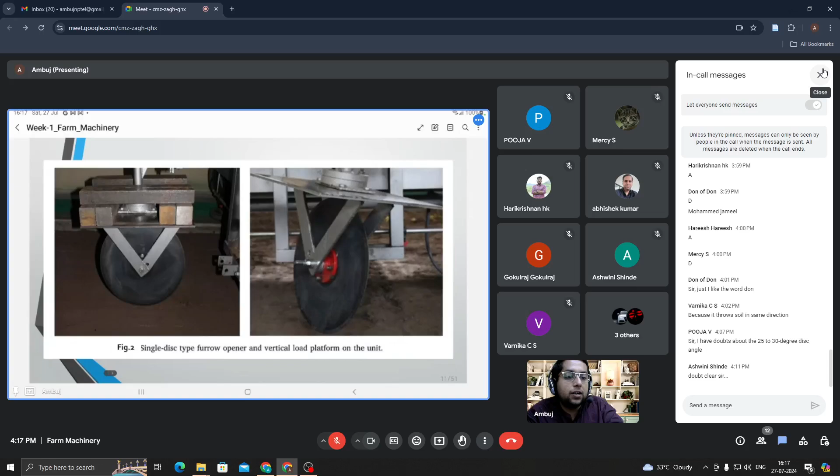So penetration is mainly influenced by tilt angle, but when I'm lowering my disk angle, in order to counter it, I'll change my tilt angle also. I'll try to straighten it, try to change this particular angle, in order to balance.

If the disk will spin so violently, then what will happen? Stress concentration will be there on this region as well as this particular region, at the edge of the disk. So your explanation, your doubt is 100% correct. The change in the penetration is happening because I am changing the tilt angle, it is not because I have changed the disk angle.

Okay, still it is there. Lower disk angle will increase the disk rotation, but in order to counteract it, I'll change the tilt angle. I'll reduce my tilt angle to minimize the stress concentration. So this reducing of penetration is happening because of change in tilt angle, and this increase in disk rotation is happening because of change in disk angle.

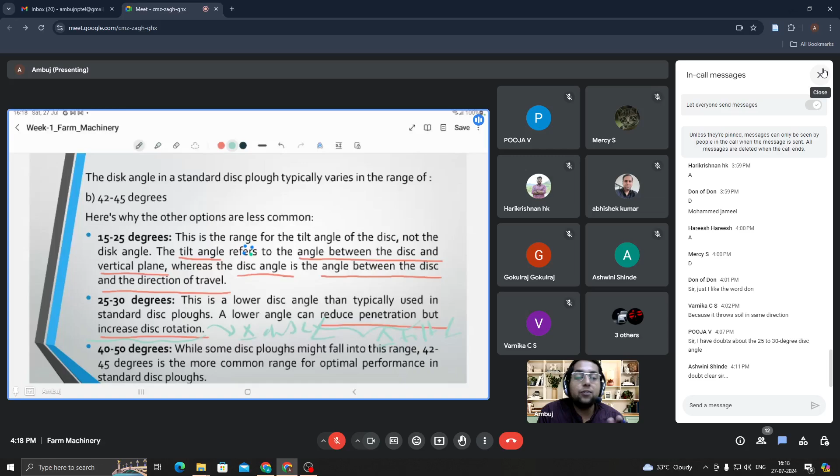See, angles will not get changed on their own. Because I am changing one angle, then as a causative effect of that, I have to change another angle in order to balance out the system.

I appreciate your doubt. Your doubt was indeed very good, it must have helped us all. Still, if you are having any doubt, then please do ask me. Or if it is clear, then please tell me.

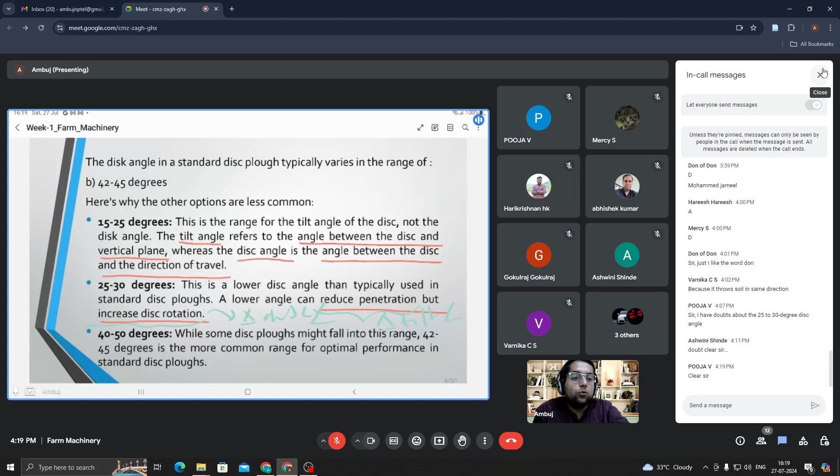Clear? Great. Please do continue this spirit till the end. Do ask me as many doubts as possible. Don't let me jump to next slide till you are clear. I appreciate the spirit of both the people who have asked me doubts. In the next class, I'll try to bring something regarding this thing. I have seen the field, so I can visualize, but I have to make you visualize. That is a challenge.

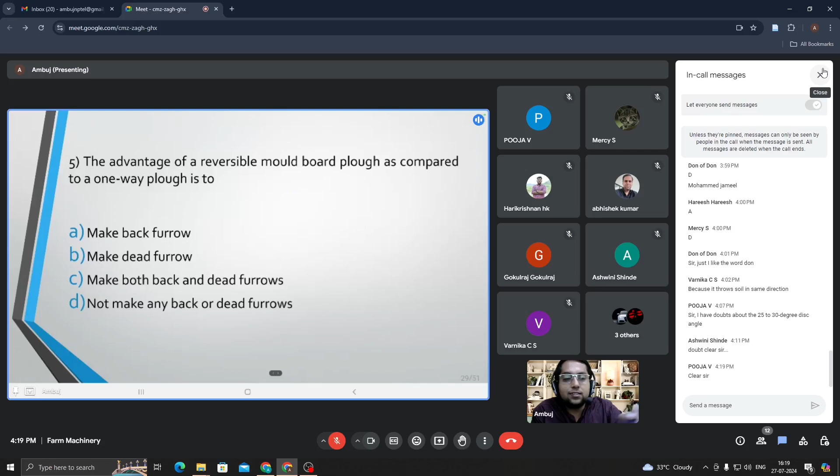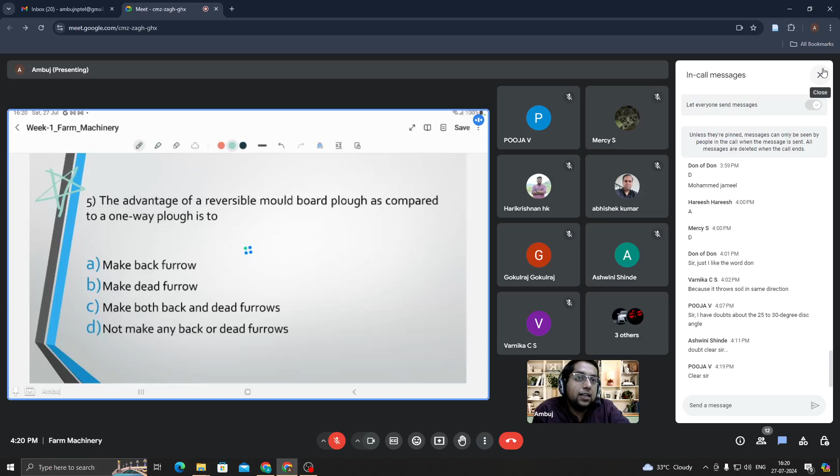Regarding this, if I get something, I'll mark it a star, then I'll bring it in for you. Back furrow and dead furrow - I'll go through some research papers and see how they are visualizing back furrow and dead furrow, then I'll go through it. Just I'll see to it. Yes, very interesting.

Straightforward question, straightforward explanation also. If you know it, you know it. If you don't know it, you can guess. Yes, B, A, C. Yes. Somebody can say D also. It would be in great rhythm.

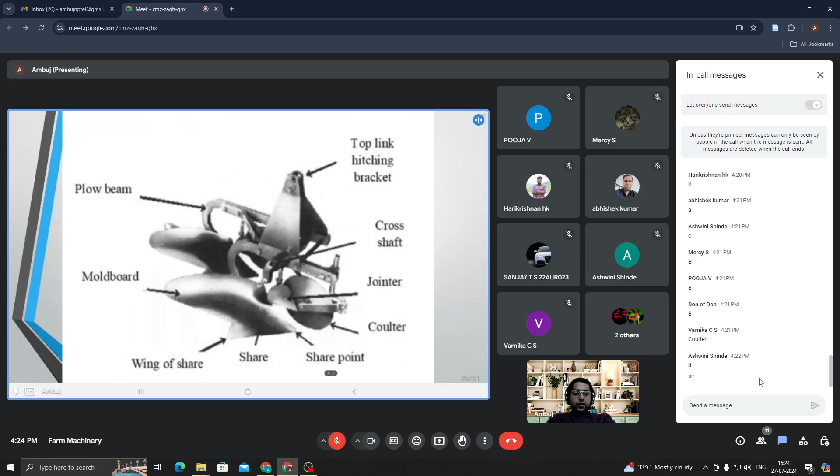Okay, let's move forward. Yes, the attachment which is used to cut furrow slice vertically from the land ahead of the plow bottom is known as coulter. Here in this figure, you can just see it - this particular one, I'll just mark it. Here this particular thing is known as jointer. Jointer in the moldboard plow parts are there. Sir has dealt with it in great detail in the lecture, I think.

Just a second. Yes, this particular attachment is known as jointer. This particular attachment is known as coulter. One will cut the trash, and another one will remove the sticky soil. Jointer and coulter - why is jointer placed? In order to facilitate decrement in the draft.

Okay, it will not decrease, it will slightly increase the draft. As well as when the soil condition is such that soil will get stuck, and if it is not removed from time to time, then the functioning of the coulter will get hindered. That is why another thing is provided, which is known as jointer. Here the explanation is there - jointer is a small plowshare that runs ahead of the main plow bottom.

Its main purpose is to turn over a small strip of soil and bury the surface residue at the bottom of the furrow, and not to cut the furrow. Okay, its job is to just turn the furrow. Okay, and coulter is there.

Okay, coulter is there. This is a disc shaped or a knife like attachment that cuts the soil vertically into the ground ahead of the plow bottom. It helps to create a clean and well defined furrow wall, and it can also sever through a tough vegetation.

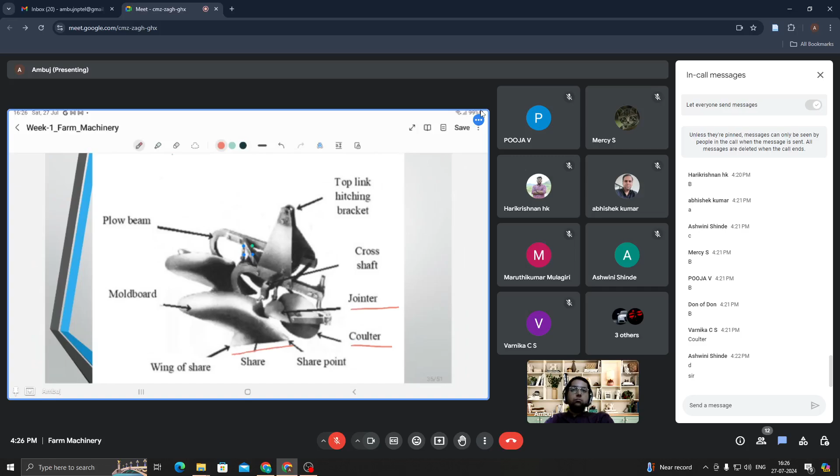Okay, and cutting edge is this particular edge. This particular edge is cutting edge, this one. Cutting edge of the moldboard plow. Okay, this is there. Yes. This term refers to the sharp leading edge of the plowshare itself, and it's not a separate attachment. Therefore, coulter is the dedicated attachment for making initial vertical cut in the furrow slice.

This is the explanation. Okay, I don't think you people must be having any doubt in this. Still, if you are having, then please do tell me. If it is clear, then please tell me that I am clear. We'll move forward. Okay.

Meanwhile, a question for you: who created the first moldboard plow? Just for your own general knowledge. This question is clear, not clear? What happened? Everyone slept? Clear. Good, good, good. Very good. And one bonus question is there. Or tough question is there.

Who created the first moldboard plow? In this form and manner. Not like that you will say that prehistoric humans created the first plow, so I am saying Neolithic humans. No, no, no. I want to ask you who created this particular moldboard plow in this form. This is a question from my side. Try to search it. For you only I am asking this question, and do tell me if you are familiar. Then tell me now, or else you can tell me in the next class.

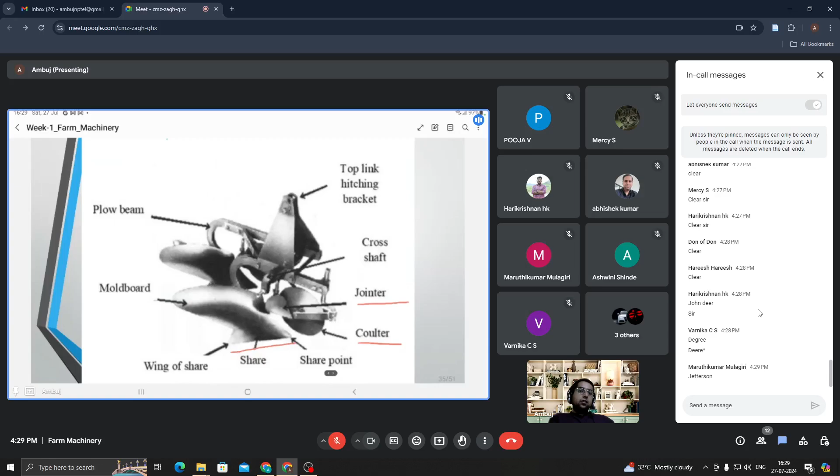Yes, Jefferson. The first commercial moldboard plow, I think, was made by John Deere himself only. Commercially, he was the pioneer in creating the moldboard plow in this form, which I have shown you, according to my knowledge. If it was some other person, then you can please elaborate. I'll bear with your explanation, no problem.

This particular concept is very useful in GATE examination. If your units are clear, then very easily you can sail through the GATE examination. Varnika has solved and she is saying option B. Others, please do try to calculate. I am just coming in 2 minutes. Okay.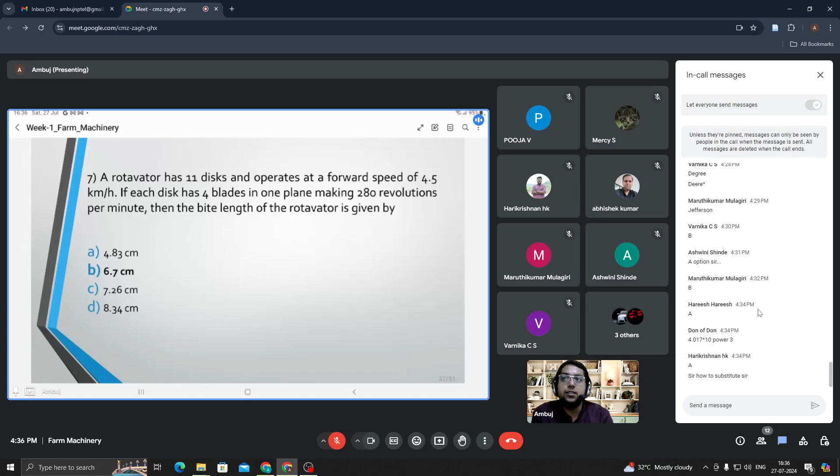Yes, how to substitute? Just wait for 1-2 minutes, I'll just tell you. VF over n into N. This is the formula. VF is the forward speed. Small n is the number of blades in one plane, and N is your revolutions per minute. Units must be same. This is the most important attribute. Let us move to the explanation. Whoever answered B, they are absolutely correct. It is 6.7 centimeters, it is not 4.83.

See here it is. VF over n into N. VF is the forward speed. Units must be the same. Small n is the number of blades per disc, and N is the rotational speed. Here I have taken VF and changed it to centimeter per minute. And I cannot do anything about small n. It is 4 only. 11 number of discs in the rotavator is of no use to us for calculating the bite length. Capital N is 280 RPM.

280 revolutions per minute. So the unit of VF would be either meter per minute, kilometer per minute, or anything having a minute in the denominator. So just go with it. L is VF over n into N. Small n is unitless, and capital N has the unit RPM, some number per minute. Similarly in the numerator you have meter per minute or anything divided by minute. So ultimately per minute will get cancelled and you will get the unit of length.

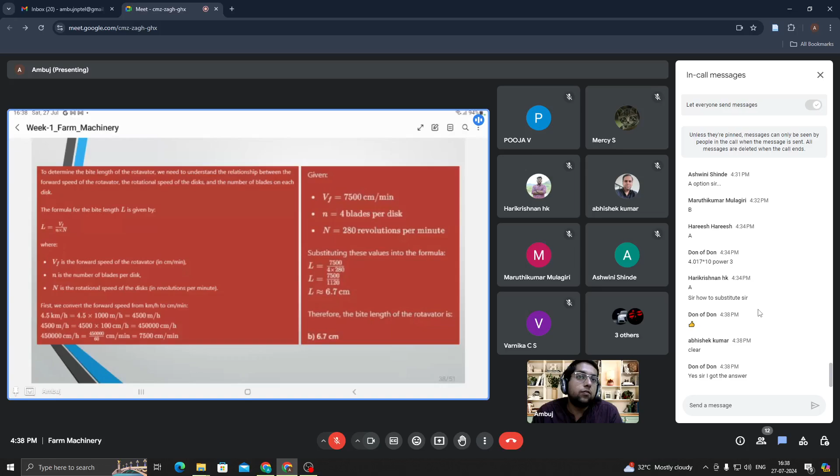The bearings on the gang of the disc harrow are subjected to radial load, thrust load, both A and B, or none of the above. If you know where bearings are on a disc harrow, you can very easily answer this question. Abhishek has answered both radial load and thrust load. Great. I already knew some of you would get confused, so I have an exploded view of a disc harrow. I'll show you, so you can immediately see which load would be acting. Do try to answer it first.

Yes. Two people have answered C, both radial and thrust load. Great. See, try to visualize: bearings are there in a disc harrow. Radial load means the load acting along the radius. Thrust will try to push the entire bearing system perpendicular to the plane in which it is fitted. Just visualize, thrust is generated by the reaction force of the gases in a rocket. It propels the rocket in the upward direction.

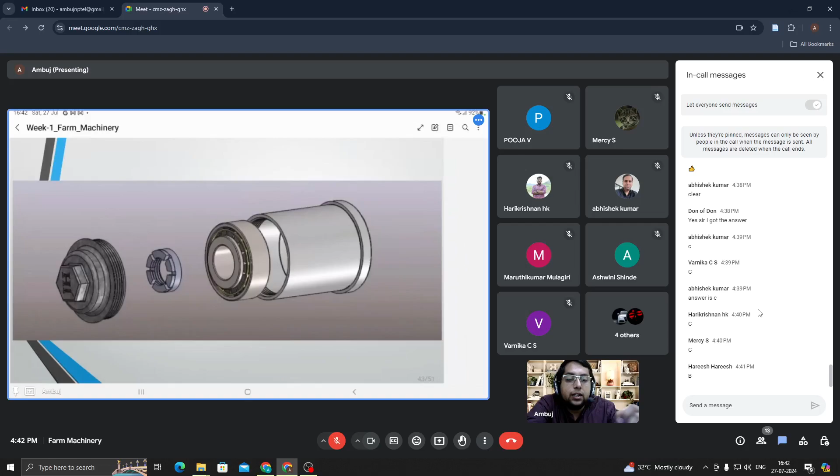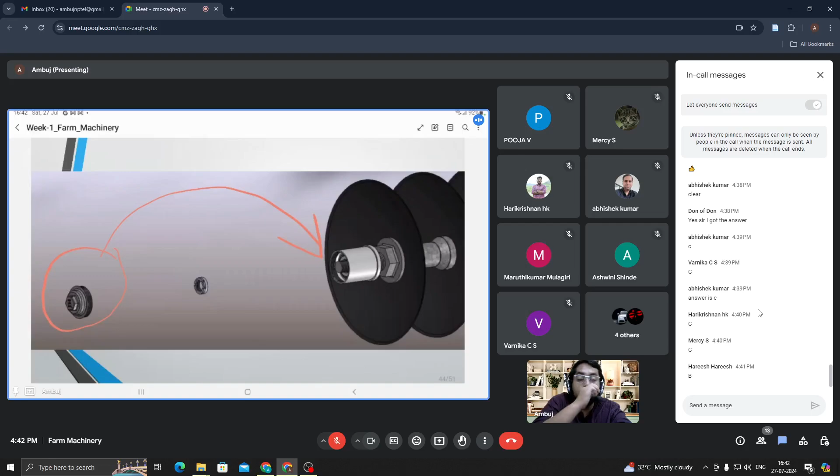Now it will get fitted. This particular system will fit inside one another, and then this system will go inside my disc harrow. So here, which force will act? Both the forces, radial as well as thrust load, will act. One will try to throw the entire bearing out of the plane, and another one will act in the plane parallel to the plane of the bearing.

This is the final assembly, here I have drawn. See, that bearing is fitted at this end. I knew that some of you won't be able to visualize it. That is why I have got the exploded view of the entire disc harrow, so you can better visualize things. So both the thrust load as well as the radial load would be acting.

One will try to throw this entire system which I have encircled outwards, and another force would be acting which will try to act in the parallel plane. It will try to throw the bearing system outwards in a circular manner. Both the radial load as well as the thrust load would be acting. Okay, clear?

Clear, not clear? What happened? Views are clear? Everything is clear? Any doubts? Anybody? Clear, great. Very good. If it is clear, then we will move forward. Anybody having any doubts anytime, you can please ask me.

A tandem disc type disc harrow, the one I showed you in the question before, with 14 discs of diameter 520 mm. Disc spacing is 180 mm, operating in a field. If the gang angle is 30 degrees, then what would the total working width of the disc harrow be? Just use this formula, fit everything accordingly, then get the answer and tell me.

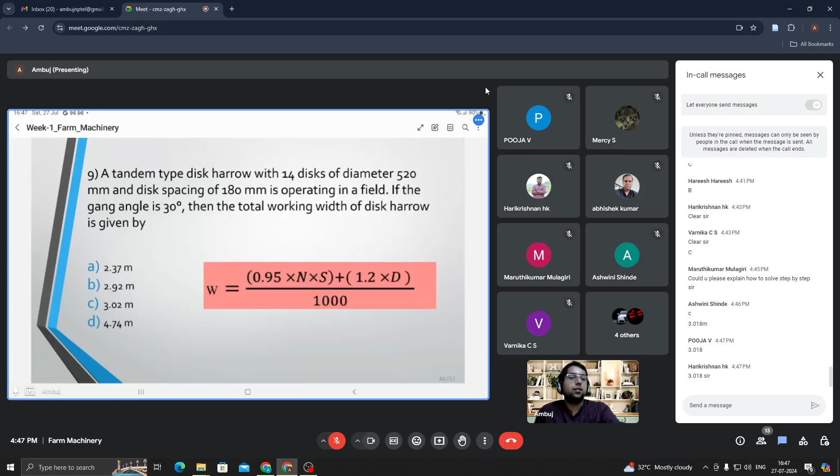Okay, let us move to the explanation. Yes, 3.02 meters or 3.018 meters. That is the correct answer. Step by step explanation is this one. This is the formula, and in the second step, we have put the values. Putting the values, getting the answer, and you would get the same thing like me. Sometimes, in order to encourage you, I have to do the question twice or thrice. I already did it before coming to the class, but I did it right now also.

This type of question is very easy. For three types of harrows, empirical formulas are available. Do remember them and try to put the values and get the answer. Since the denominator is in the thousand, the S and D would be in mm only. That is why we are dividing it by 1000 to get the answer in meters. In empirical formulas, you don't play with the units. We play with the units in which no constants are present, like 0.95, 1.2, 1000. Then we can play with the units.

Like in the previous question, I showed you we have VF over n into N. In that particular question, we can play with the units. Is it clear? Maruthikumar, is it clear to you? Not clear? Still want an explanation? Okay, clear, great. If you want an explanation regarding tandem type disk harrow, I'll just tell you in short, no problem.

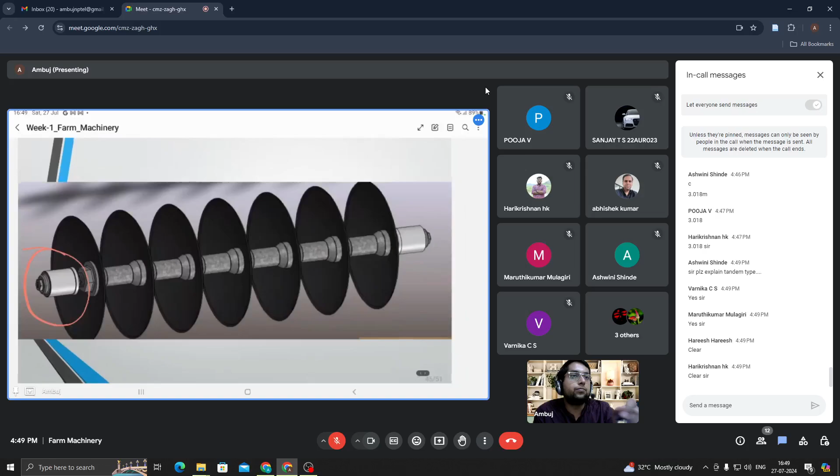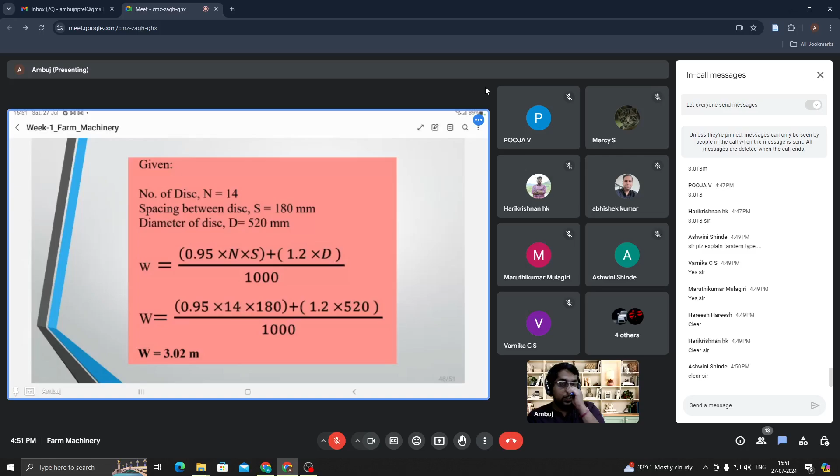Let us move forward with one more numerical question, the last numerical question for the day. After that, you can enjoy the rest of your day. A tractor drawn rotavator is operating at a speed of 4.3 kilometer per hour, and actual field capacity of the rotavator is 0.3 hectare per hour, and the field efficiency is 70%. Calculate the number of discs on the rotor if the spacing between two consecutive discs is 20 centimeters. It would be 5, 7, 9, 11. Just try to answer it.

This numerical is somewhat like quantitative aptitude. Even if you don't know any formula, but you know the relation between actual field capacity and theoretical field capacity, you can still answer this question. I'll give you a hint. Actual field capacity is there. Theoretical field capacity can be calculated. Then the width of the implement can be calculated. Then, since the spacing between two disks is known, the number of disks can be calculated. Try to solve it. I'm here for you, I'll explain each and every step. But first you should try, because in the examination you have to play the ball first.

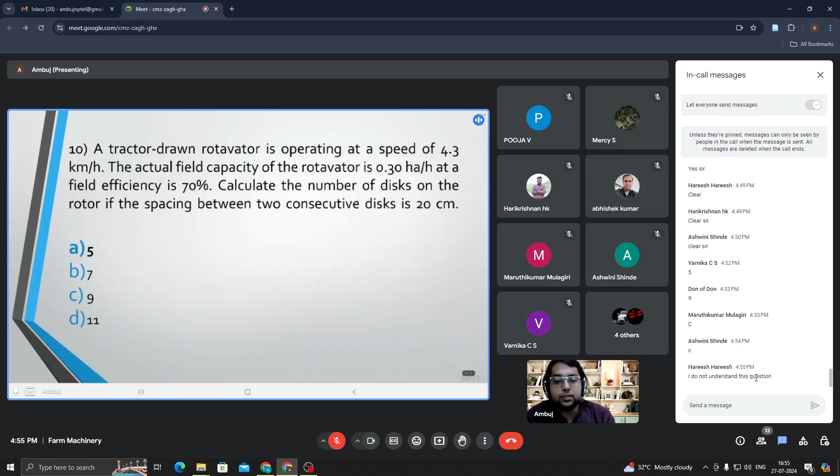Anybody else? Please do solve it. Try to solve it. I told you the procedure also, okay? TFC equal to AFC, okay? I do not understand this question. Good. Now let me explain it, okay? Just a second. Correct option would be 5, not 9, okay?

First of all, just try to follow this procedure. This is an empirical procedure, okay? No formula, nothing required. First of all, forget about the speed. I know actual field capacity given in the question. Field efficiency is given in the question. Then theoretical field capacity I'll calculate by using the formula: theoretical field capacity is actual field capacity divided by field efficiency. Or you can say that field efficiency into theoretical field capacity is actual field capacity.

For you people, I just wanted you to try it first. I'll explain at the end of the question. Don't worry about it. Yes. Theoretical field capacity, first I have calculated. I am talking from step number 2 only. Just bear with me.

Then theoretical field capacity, I'll try to have it in the same unit. So here I have used the unit as meter and minute. So just try to convert it. 1 hectare is 10 to the power 4 meter square. Similarly, 0.4286 multiplied by 10,000 is 4286 meter square per hour. In per minute, I'll divide it by 60. Then I'll get the TFC in meter square per minute.

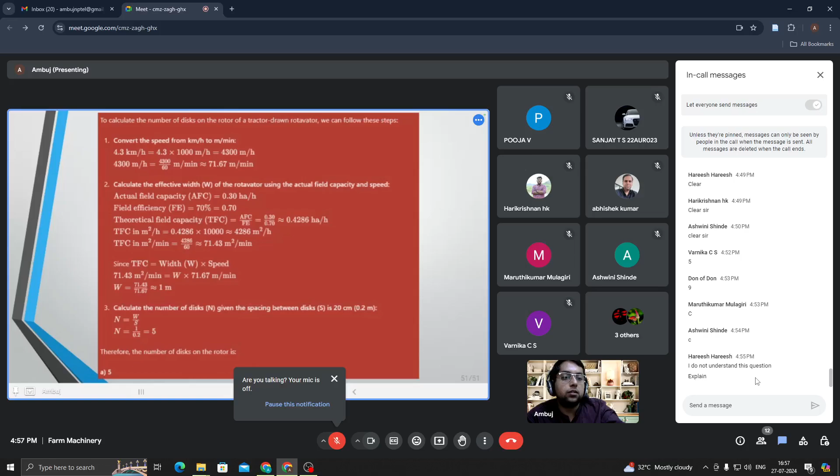Then TFC is S into W, speed multiplied by width. So the TFC unit is meter square per minute, so speed should be in meter per minute. Then only units would get balanced. Meter into meter per minute will give me meter square per minute. I'll just write it. See, every time units are balanced in this type of question: meter square per minute should be equal to meter multiplied by meter per minute.

So from here, what am I getting? Width of the implement. If I get it, then I know the number of disks. Since disk spacing is given as 0.2 meter and width of the implement I have calculated as 1, 1 upon 0.2 is 5. So correct option would be 5. Varnika has answered it correctly. Except her, nobody has answered it correctly. Try to look at the explanation.

Yes. Good. If you understood it, fine. If you want me to repeat, I'll repeat it also. Just go through the explanation once more. You will be able to get it. Hareesh, understood? Good. Great. If you didn't get the question in the very first attempt, no problem. After the explanation, I think it would have been clear to you and others also. If you want me to repeat once more, then please tell me.